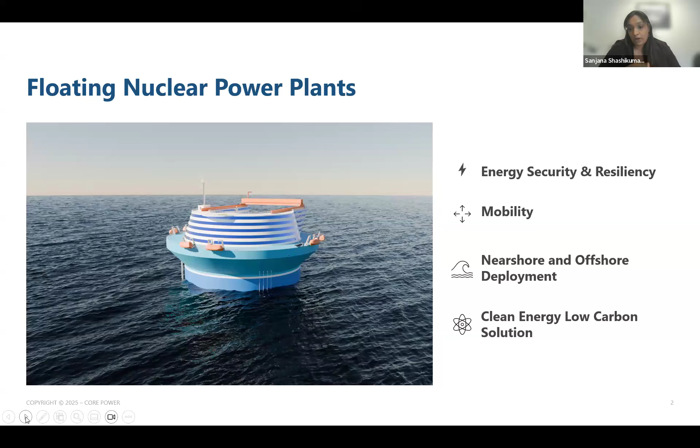So from that central facility, the FNPP would be transported to a pre-approved licensed site for operation. We see various potential applications, both near shore and offshore for FNPPs, and I've highlighted a few of them here.

In the nearshore environment, FNPPs are sited close to shore to provide power to coastal infrastructure, such as powering port operations. This is currently how operational floating nuclear power plants and other non-nuclear power barges are utilized. The proximity to shore reduces distances between the source of power and the end user, reducing transmission, construction, installation, and infrastructure costs.

Alternatively, the offshore deployment model sites FNPPs further from shore, similar to offshore wind farms on the outer continental shelf. This reduces their exposure to tsunamis and earthquakes while providing power to offshore energy users, such as data centers, oil rigs, and e-fuel production facilities.

The second application we're developing are nuclear propelled vessels. This application is not new. In addition to nuclear navies, you may be familiar with the nuclear ship Savannah. It was a commercial nuclear powered ship that sailed during the 60s and 70s that transported passengers and cargo and visited over 70 ports. It was part of President Eisenhower's Atoms for Peace movement.

That being said, today we are designing vessels that utilize advanced reactors instead of PWRs that solve some of the scalability and cost challenges faced with the development in the 70s, while still maintaining safety and the ability to be commercially insurable. Nuclear powered vessels are attractive to the maritime industry because they offer zero emission operation and support

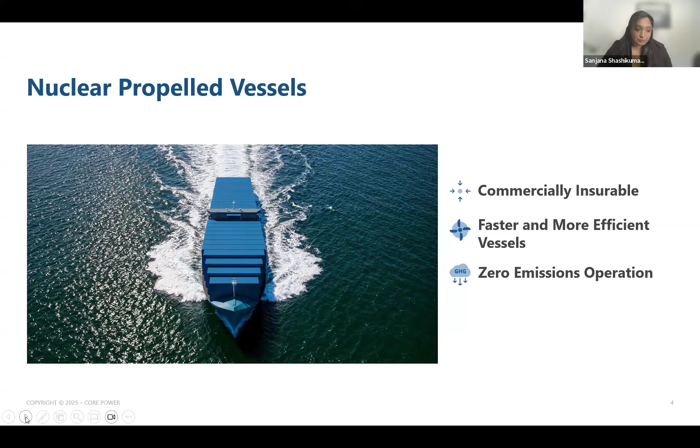So to understand how to specifically address nuclear security, which is our conversation today, I'm going to walk us through some deployment models and then discuss some of the important considerations that Core Power is taking and how we're incorporating those into this phase of development.

This first scenario is specific to FNPPs. Here, it is built and transported to the operating site without any radioactive material. The fresh fuel is independently transported, and it is commissioned at that operating site. This type of shipment is widely practiced, as you all know. It's how terrestrial reactors are fueled, and it was utilized for the commissioning of the currently operational floating nuclear power plant, the Russian Akademik Lomonosov. After the Akademik Lomonosov was constructed, its two unfueled reactors on board were transported to Murmansk, where it was commissioned.

The second scenario also specifically addresses FNPPs, particularly at the beginning of the life cycle. Here, the FNPP would be loaded with fresh fuel at that central facility before it's transported to the operating site, which of course has a predetermined time frame and is licensed to operate at that location.

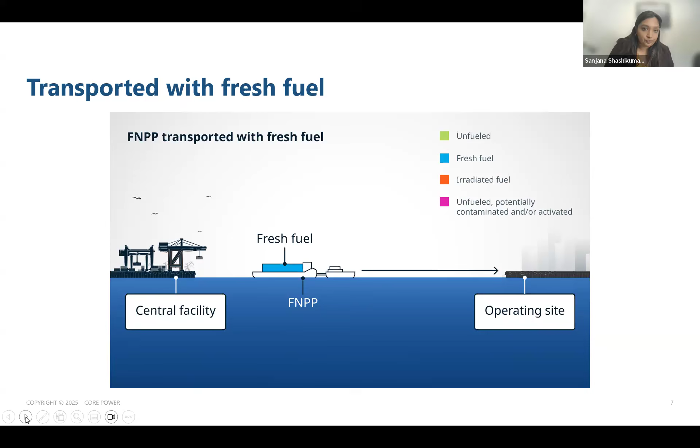This scenario accounts for the transportation models that Core Power is specifically exploring, in which the spent fuel is stored on the FNPP or vessel throughout the duration of the life cycle. For FNPPs, the reactor is commissioned at the central facility before being transported. During the transport, the reactor is subcritical, but throughout the various stages of the life cycle, and for the entirety of a nuclear powered ship's life cycle, the used fuel is transported on board, either in the reactor or in a spent fuel pool, from that central facility to operating sites or between various ports.

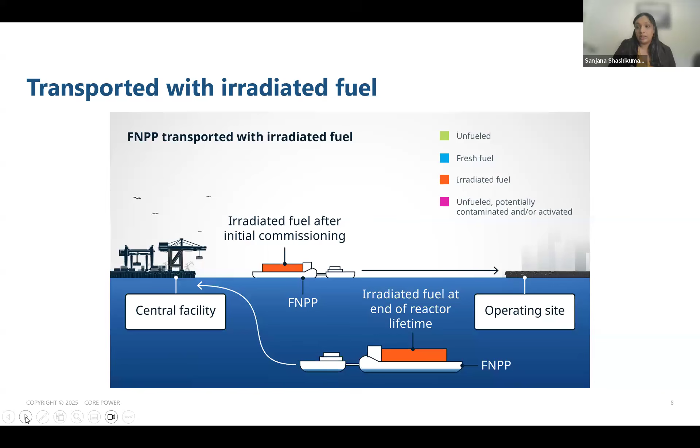Now that you have a better understanding of what these deployments look like, this sets the stage for our discussion today on the importance of security regimes for floating nuclear applications. It's important to know that this framework development will require coordination across the Nuclear Regulatory Commission, given they're the primary lead for enforcement of nuclear security requirements for commercial facilities in the United States.

Central to our approach at Core Power with nuclear security has been understanding and differentiating between boundaries, barriers, and controlled versus uncontrolled spaces, and then establishing appropriate protocols and security measures to restrict access between these defined spaces. These protocols would be maintained throughout the entire operational and decommissioning lifetime, and will also be constantly monitored to understand changes in potential threats, allowing necessary adjustments in capability and performance of security programs.

With advanced reactors and this application currently under development, we're already identifying and incorporating design features today that can mitigate threats and risks when these are deployed, such as multiple containment structures and fuel type design.

Before I conclude, I wanted to share this. Core Power was a founding member of the Nuclear Energy Maritime Organization. Now it has over 50 members, and I would not be surprised if many of you today are part of organizations affiliated with NEMO. I bring this up because NEMO has NGO status at the IAEA and the IMO, the International Maritime Organization, and are leading conversations to develop the necessary frameworks to support nuclear mobility.

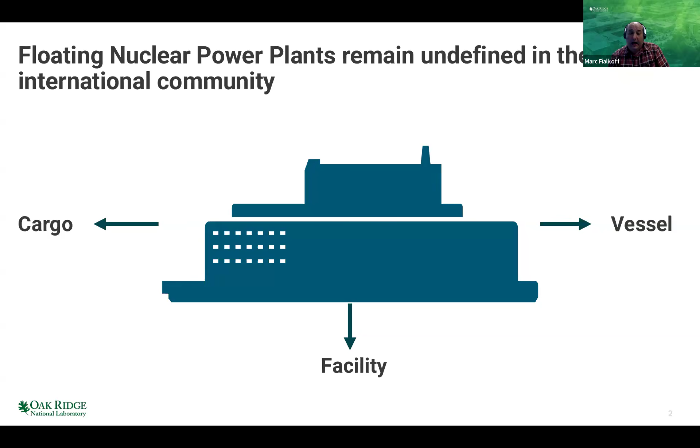So this is a little bit of a crude representation, but one of the questions that comes up with floating nuclear power plants, especially in the literature and in international conferences, is what is the threat for a floating nuclear power plant from an act of piracy, especially when the FNPP is maybe in transit on the high seas or operating on the high seas. Sanjana pointed out in her presentation that floating nuclear power plants could be deployed offshore for oil and gas extraction. So if they are operating in the high seas and there's a pirate ship nearby, this is a little, again, crude icon, is it susceptible to piracy?

And what we start to look for is the international framework for not just nuclear security, which is governed primarily by the Convention on the Physical Protection of Nuclear Material, but for us, we also have to look at UNCLOS, the UN Convention on the Law of the Sea. And UNCLOS does give a definition for piracy. I will not read the whole definition of piracy, but for our purposes, what we're interested in is, first, the individual, the pirate, is conducting his action for private ends. And this becomes a challenge and has been written about and documented, the difference between a pirate and a terrorist, and what type of legal framework is appropriate for criminalization and adjudication.

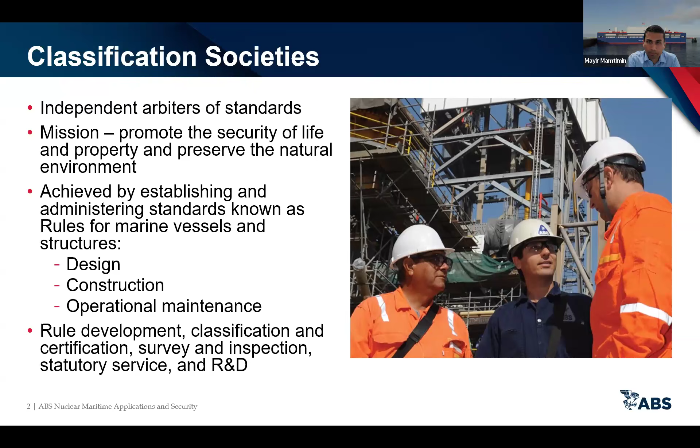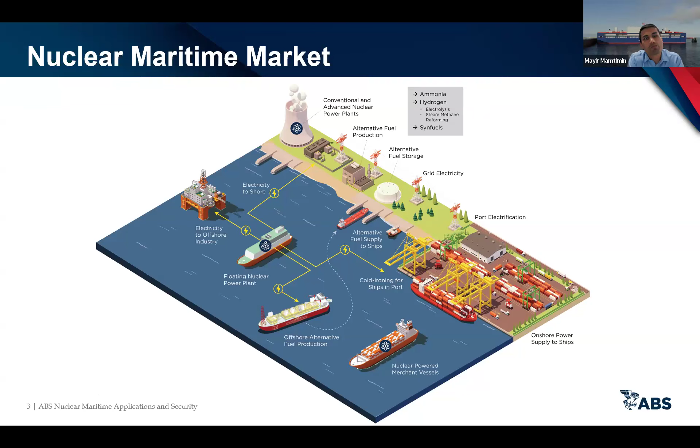So going to the next slide here, we published a first of its kind Requirements for Nuclear Power Systems for Marine and Offshore Applications in 2024. This is applicable for all kinds of floating nuclear power plants. And in order to get the class, it's a mandatory power service nuclear notation. This requirement is written such that it's suitable for any type of nuclear technology, so it's agnostic of the type of reactor or nuclear technology being used.

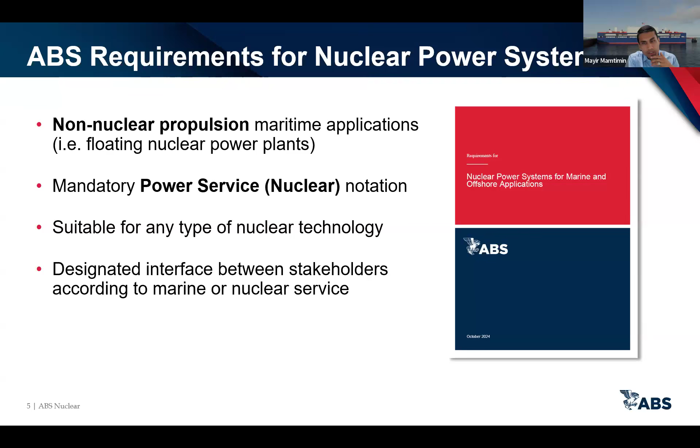And one of the unique parts of these ABS requirements for nuclear power systems is that we introduced a first of its kind document called the interface document, where most of the stakeholders between marine and nuclear industries overlap, and the regulatory gaps are identified in this interface document.

So just a bit more on this interface document. As you can see, this is a simple depiction of a floating nuclear power plant and all the subsystems, the nuclear subsystems as well as the maritime subsystems, and the interaction between them. This interface document mainly tries to establish the technical agreement among the stakeholders and tries to establish the regulatory overlaps or even gaps between different regulatory bodies, from nuclear regulatory bodies as well as maritime regulatory societies.

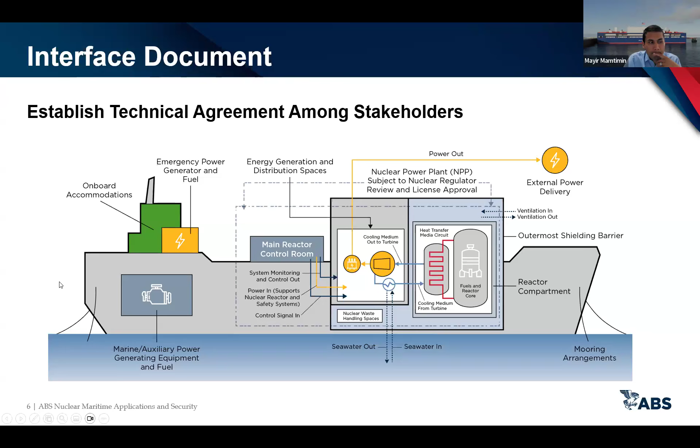So looking at this FNPP requirement of ABS, I thought I would go ahead and look at all the considerations or discussions of the nuclear safety. So I populated this slide looking at the FNPP. So the FNPP is written mainly using this philosophy called goal-based standards for nuclear security. The goal-based standards focus on the desired outcome instead of a prescriptive process to achieve that desired outcome. It often comes with a functional requirement that that system must follow to achieve these goals.

So in our FNPP requirement, the nuclear security is addressed by starting with risk assessment, where the hazards and the associated risks are addressed. And it also introduces risk reduction measures to mitigate effects. In the next section, nuclear systems, the nuclear security is also a key part of it, from structural, radiation, physical security, nuclear material security, and all the way to decommissioning, waste handling, and operational safety.

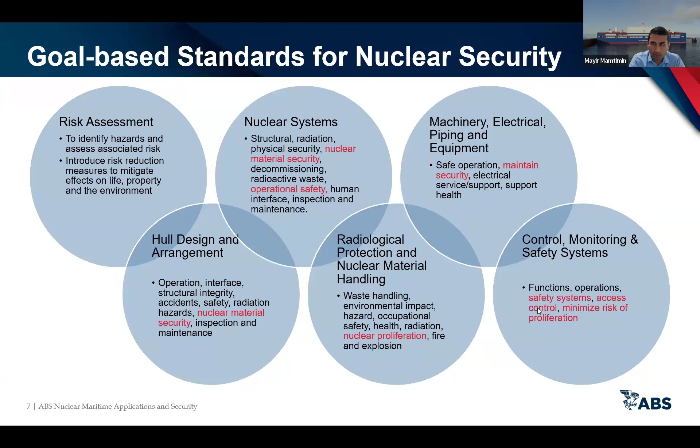From the ABS FNPP requirement document, another thing that I did was try to pull out all the phases of the FNPP life cycle in which nuclear security is addressed. So roughly, we can look at these 7 different life cycle phases. Again, these are under development, and some of the systems are not quite the same as these life cycles. But it starts with the design phase, where security by design is embedded. Then the next phase could be the vessel construction, where the interface document comes in very handy for different stakeholders. The next phase could be the nuclear system installation phase. As Sanjana mentioned earlier, this is again being developed and fleshed out.

Transportation and commissioning, either before fresh fuel is installed or after fresh fuel is installed. This is a key concern that needs to be addressed for nuclear security. The operational phase, where the FNPP is positioned and providing power. Then we have the maintenance and refueling phase, either for inspection, dry dock inspection, refueling, or just regular maintenance. And at the end, it would be decommissioning, retiring of this vessel,